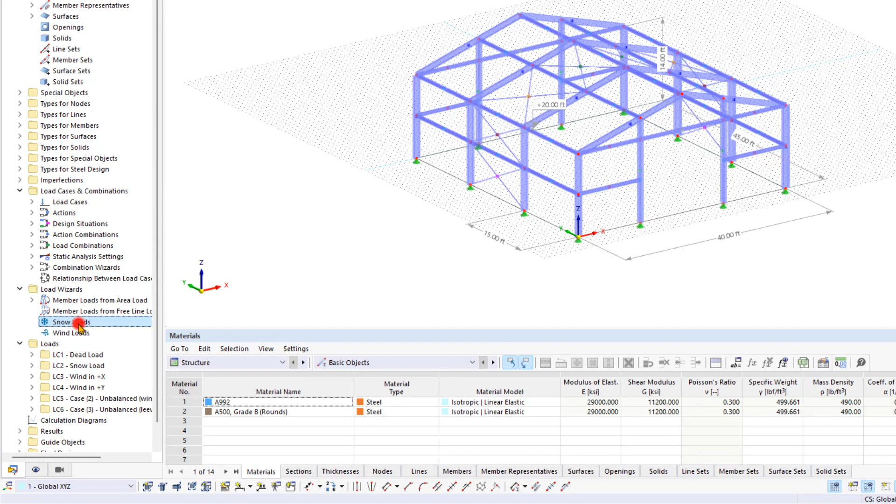Let's begin with snow loads and open the respective load wizard from the Data Navigator by double-clicking here. In the new dialog box, we start by selecting the Duo Pitch Roof type. You can enter the roof corner nodes manually in the field below, or alternatively, click the respective symbol in the graphic.

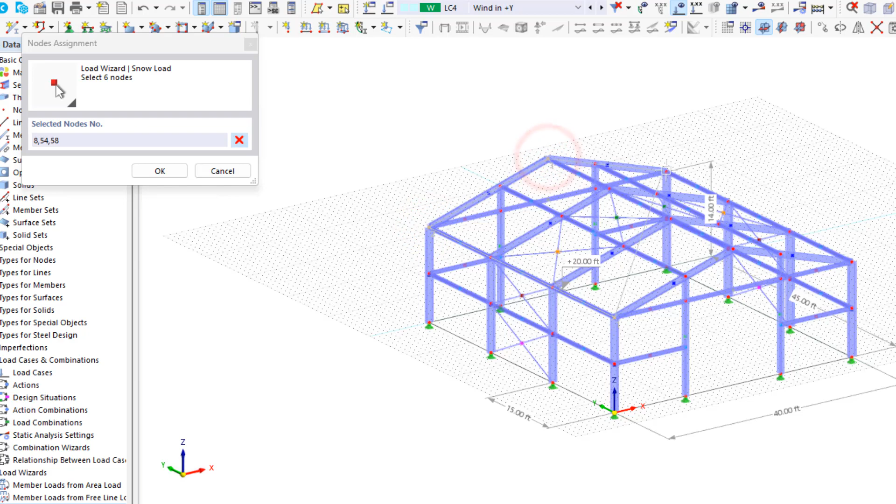A new feature in RFEM 6 allows you to exclude individual roof surfaces from the loading in this dialog box.

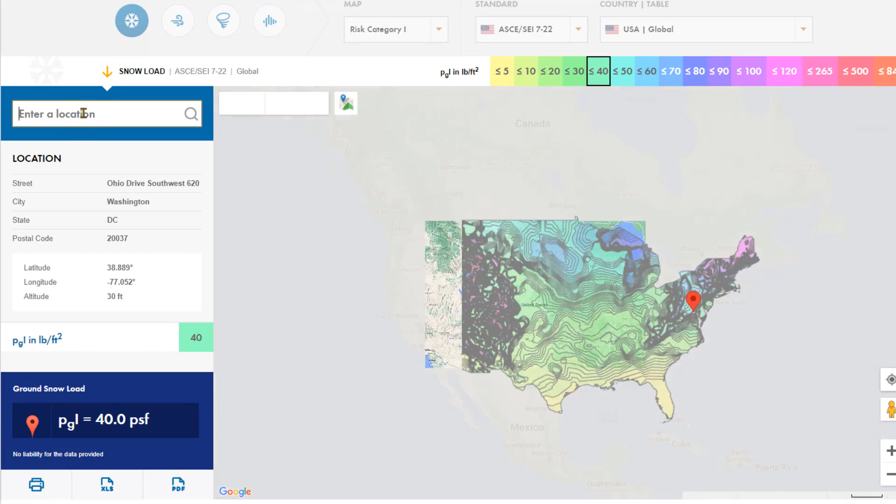In the Parameters tab, this is where we can enter the model parameters such as the location, load zone, and so on. With this button, we can enter this location automatically by entering an address in our GeoZone tool.

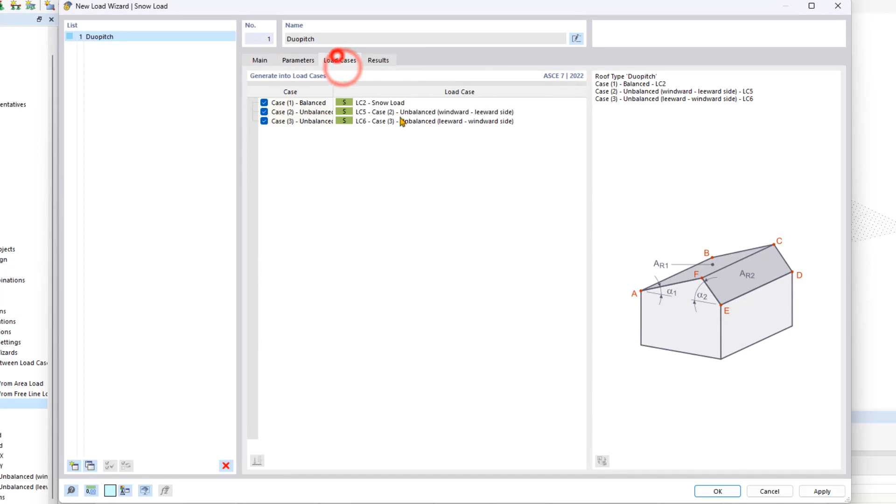The next tab shows the number of load cases required for this wizard. This tab includes all load cases that have already been created and assigned to this action category. In this case, it's the snow load case that we created before, and by clicking the button in the lower left-hand corner, RFEM can generate the remaining load cases automatically.

You can confirm this entry by clicking OK.

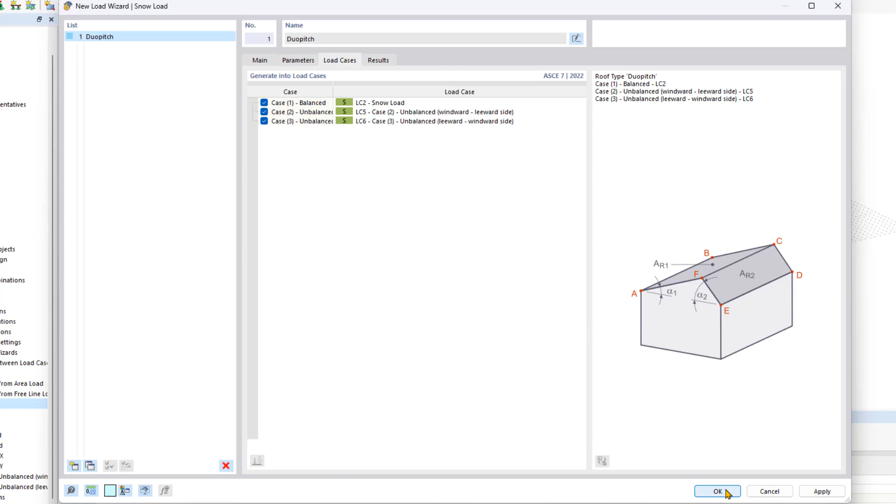And now we can see the generated loads on the roof of the steel hall. The automatically generated load cases can be found in the list above.

Now let's apply the same principle to the wind loads. We open the load wizard again, this time for the wind loads. Similarly, we select the Duo Pitch Roof type, and just like with the snow loads, click on the nodes of the roof.

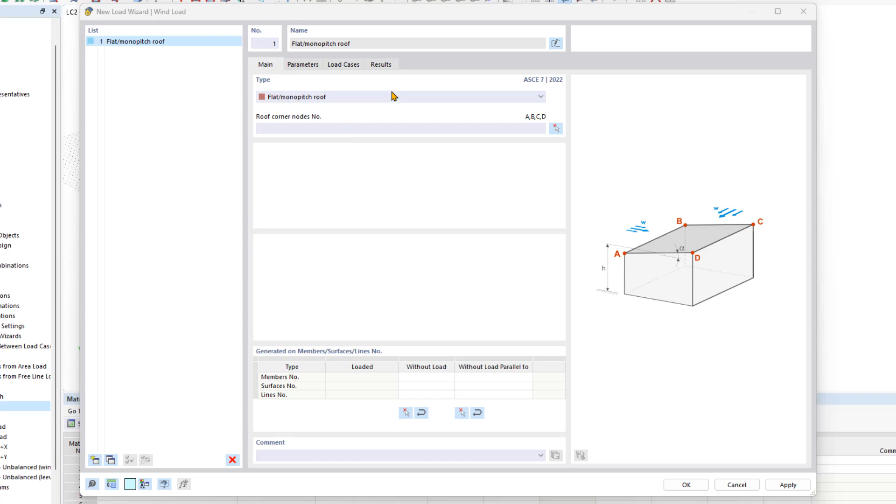To reduce the number of load cases and load combinations, we can deactivate the opposite directions of the wind load in the main tab.

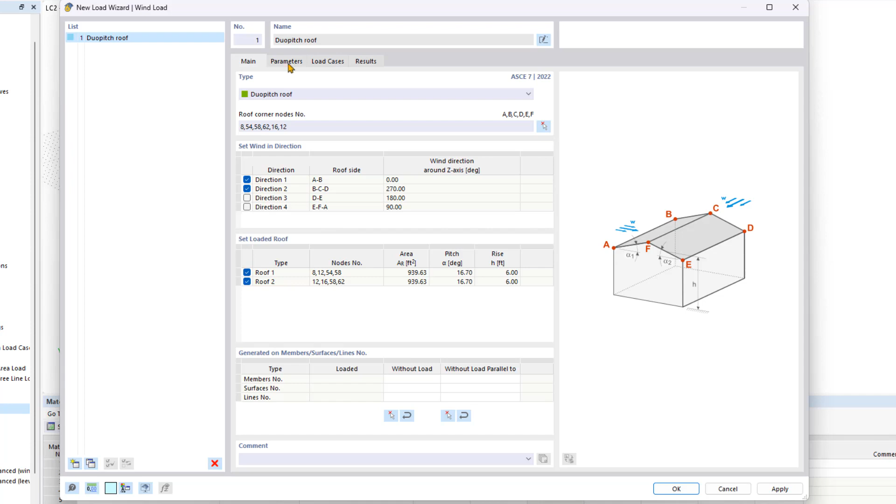The properties of this load case can be found in the Parameters tab. Here we can use the GeoZone tool again to enter the address/location of the building site.

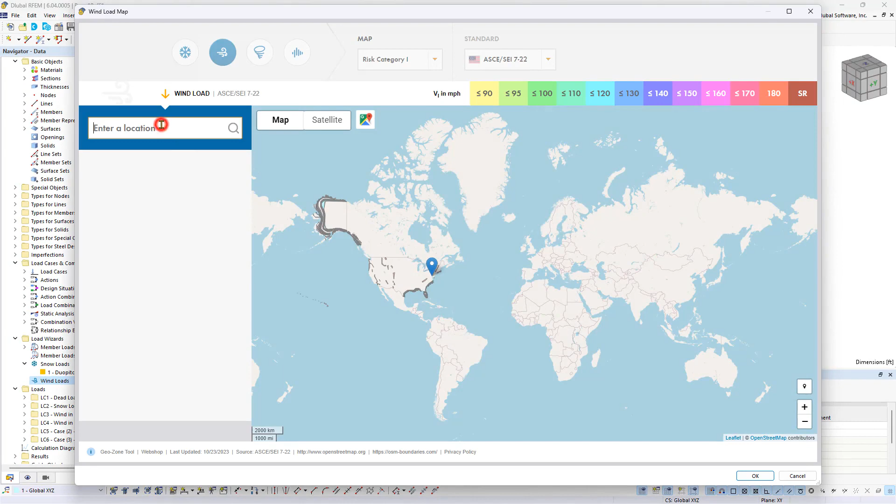Here we also need to specify the structure height. Otherwise, no wind load case can be generated.

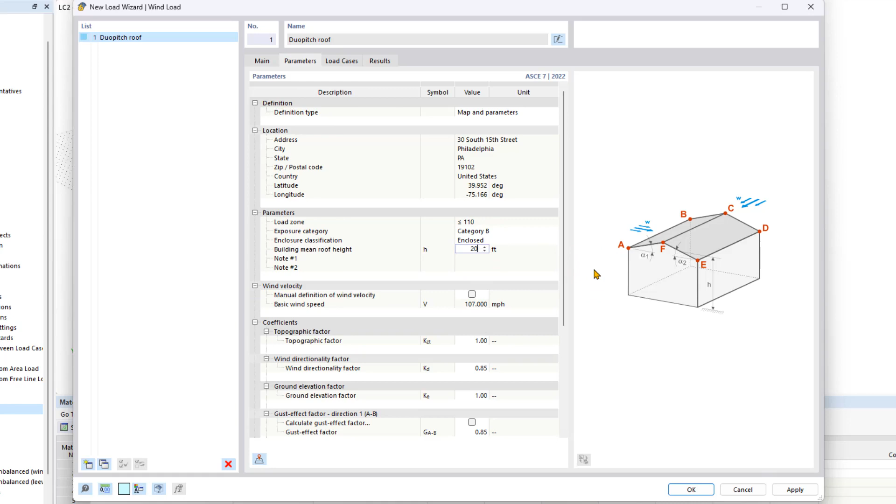In the Load Cases tab, we must create 2 new load cases since the first 2 were automatically recognized by RFEM and inserted here.

However, we will use them for the lateral wind load in the next video. We can generate 2 new basic load cases by deactivating and reactivating the first 2.

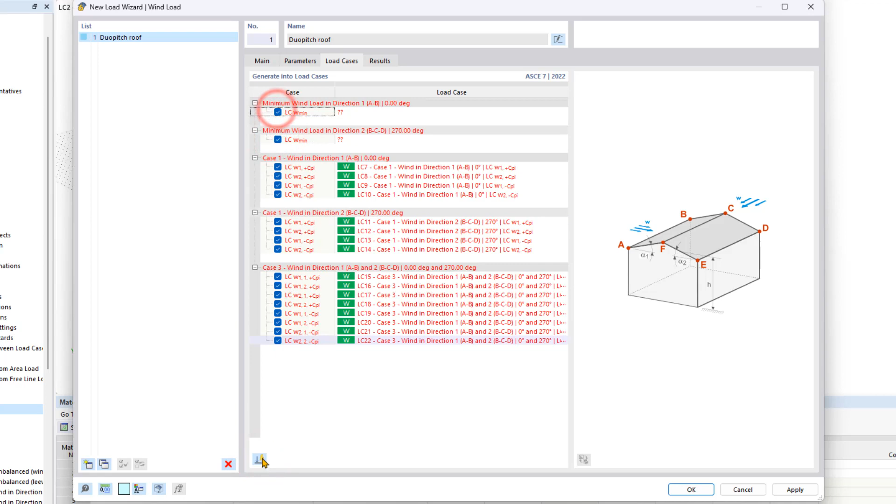Now, like the snow load wizard, we can generate all load cases with just one click.

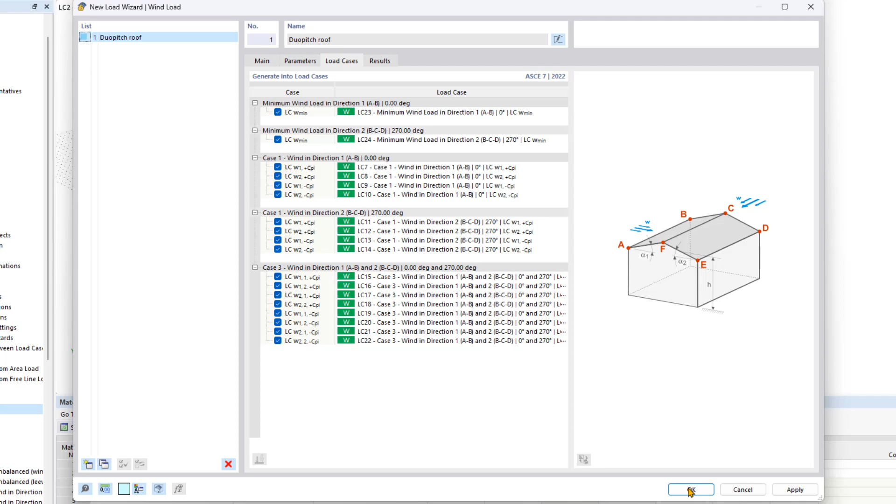If we are satisfied with the properties and parameters that have been entered, we confirm this dialog box, and now we can see the wind loads that have just been created on the structural analysis model.

This way, we have easily and conveniently generated snow and wind loads using the load wizard. In the next video, we will dive into the load distribution. Until next time.